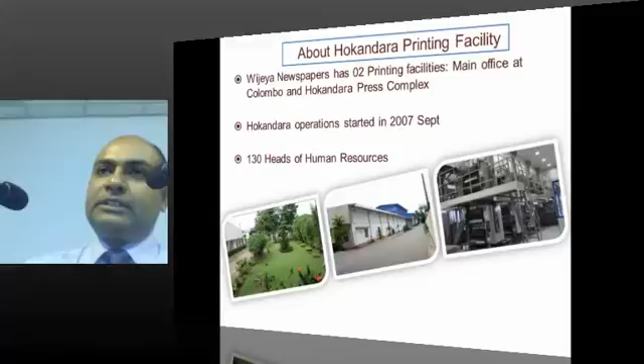Earlier we used to have more than 350 employees to handle the balance 15% operation. That is the difference. I will show you how we reduced this from 350 to less than 150, and what our efficiencies are.

Those are our publications. I think you are all aware of the Sunday Times, and Sunday Lankadeepa is our Sunday newspaper. Recently, 3-4 months back, we started our newest Sunday paper called Desha. Also we have Daily Lankadeepa, Daily Mirror, and others - these are our daily publications. In addition, we have some tabloids: Sirikatha, Tarunaya, Wijeya weekly children's education magazine. We are also aware of Wijeya magazine and Pariganaka magazine, which is the only singular IT magazine in the country at the moment.

Also Lanka Woman, Hi and Go, which are society magazines, and a host of online publications. In addition, 2-3 weeks back we started our newest publication called Tamil Mirror, a daily Tamil paper. We started it only as a midweek publication, but from next week onward we will publish it as a daily paper.

The content of my presentation covers the philosophy change, what infrastructure development we have done, what concepts we used to change that philosophy of infrastructure development, then green initiatives - where the green initiative came from - further improvement to green productivity and best practices, and finally sustaining development through ISO 14001 environmental management system as well as energy management system, and future sustainable building design.

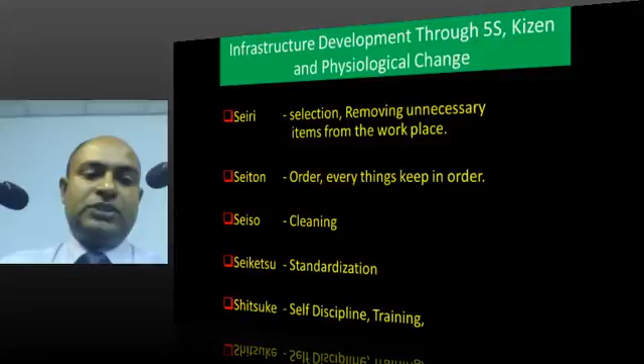So as the first concept, we implemented 5S at Wijeya Newspapers Limited. 5S is a Japanese concept which came from Japan. The 5 S letters all start with S: Seiri, Seiton, Seiso, Seiketsu and Shitsuke.

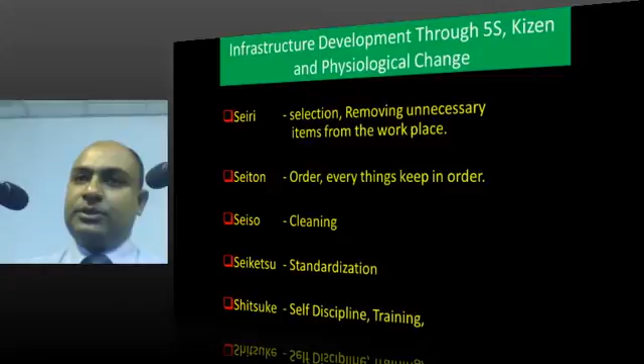I will show you how the 5S started at Wijeya and how we could get results from the 5S. The 5S begins with Seiri.

You can see these are some unwanted items which were gathered in our day-to-day workplace, office premises as well as in the factory area. We called all employees, top management to bottom, to get together and remove all unnecessary items from our workplace. Not only the workplace but also our office, the drawers, cupboards, and from our pockets and handbags. We remove all unnecessary items and then keep everything in order.

The second S is the Seiton, that means each item having its rightful place. We have given separate places for each and every item, not only machineries and equipment but also even pen and pencil, tube, Tipex, puncher, or even cleaning items - we have given separate places for each.

Then Seiso. Seiso means cleaning, with meaning actually cleaning and inspection. Normally every day we get together at 9 AM, all employees with top management.

We spend 5 minutes on this, we call that 5S 5 minutes. We check our office area, we check our machineries - we have divided all our factory premises into different areas and allocated responsibilities. In my responsible area, I have to look and see whether there are any abnormalities. If so, we write it down and later discuss it and do the necessary improvement.

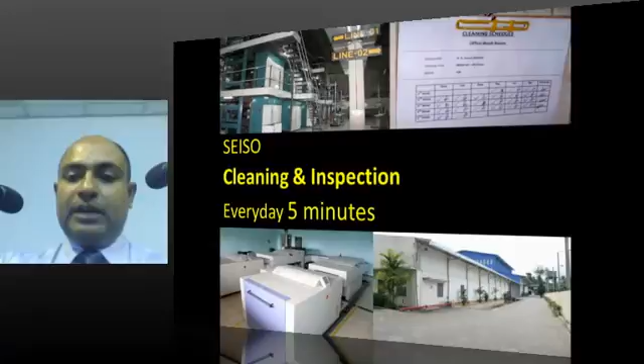Then Seiketsu - color coding, numbering, and directing. We have given a separate color code system. You can see some pipelines - all pipelines, compressed air, wastewater, drinking water - we have given directions to reduce damage to the environment. If something bursts, we can immediately close the relevant valve and minimize the damage to the environment.

Even the notice board - we have given the responsibility to a responsible person who has to maintain the notice board up to standard. We strictly follow the X-Y direction, X-axis and Y-axis. We can't put the notice board just hanging like that - that's our philosophy.

Those are some color coding systems which we have implemented and introduced to our factory. Each and every department has its own color, which they use for demarcation, names, file records - everything - for identification of their department. We have also given a color code system for each and every pipeline, and also some area marking color codes.

For the safety area or dangerous area, if you have some moving item, sometimes we have to keep an item in a place temporarily, and later we can remove it.

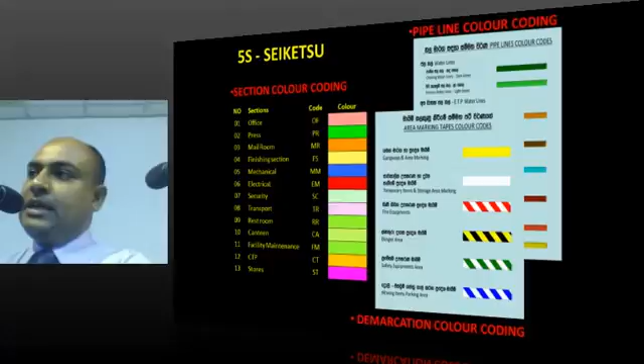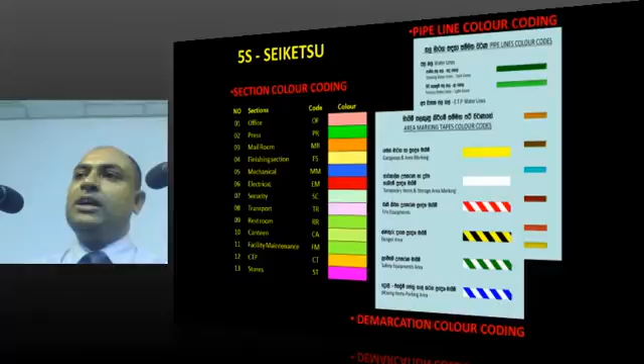But we can easily identify if there is a temporary item, we put some marking. Temporary item and storage area marking - we have marked with the white line. Sometimes that blocks our entrance or footpath, but that's only for a temporary purpose. According to our requirement, we have allocated this requirement.

Sometimes international, sometimes national, sometimes our own standard to do the sustainable practices. Finally, Shitsuke is the discipline, training, and top management commitment, which is very important. If our employee introduces something, implements something, if they did the best work, we select the best operator of the month, and the best 5S practices of the month. At the end of the month, we give appreciation and rewards from our top management or heads of departments. Likewise, we always motivate our employees.

Yes, you can see some developing culture. After implementing some system, whatever 5S, cleaner production, ISO, something like that, at the end of the training program we conduct some slogan or poster competition. We organize some competitions, then we can realize how much they have absorbed in their mind, the knowledge. Only then can they write down or come with their ideas. You can see there are two different competitions.

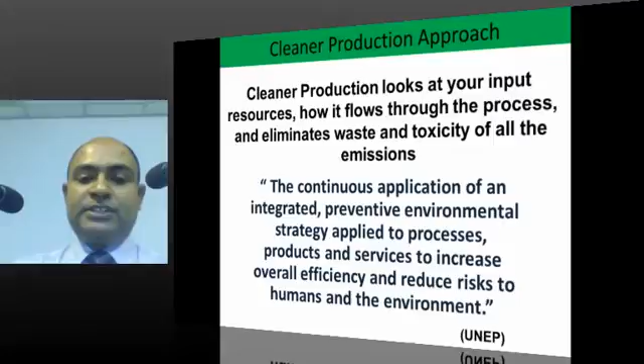The continuous application of an integrated preventive environmental strategy applied to processes, products and services to increase overall efficiency and reduce risk to humans and the environment. Continuous application - which is very important.

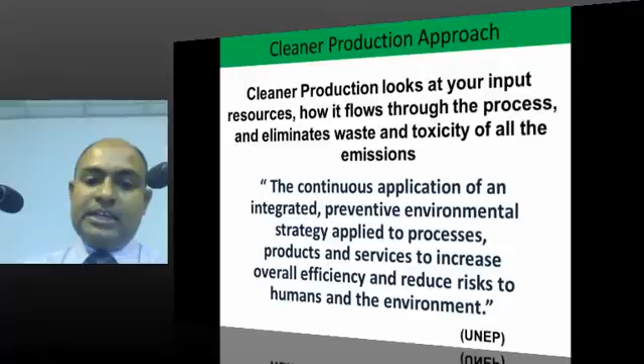That's cleaner production. At Wijeya, we started cleaner production from the 3R concept - 3R means reduce, reuse and recycle. We reduce our consumption, then we reuse whatever material or waste item is possible, then recycle at the last stage.

A very important equation: input equals output plus waste. At Wijeya Newspapers Limited, we don't have this waste - we have added some value to this waste. Waste is a valuable resource at the wrong place, in the wrong time, or in the wrong form. Only then can we say it's waste; otherwise, it's a valuable resource.

You know how I can say that we don't have waste? The secret is separation. You can see this is the separation practice which we have applied at Wijeya. Even in the canteen, we have separated three different bins. The first one is for used waste food collection, the second one is for used polythene - wrapper covers, lunch sheets and so on - and the third one is for paper. Then we send these for recycling separately. Likewise, we have different waste collection centers.

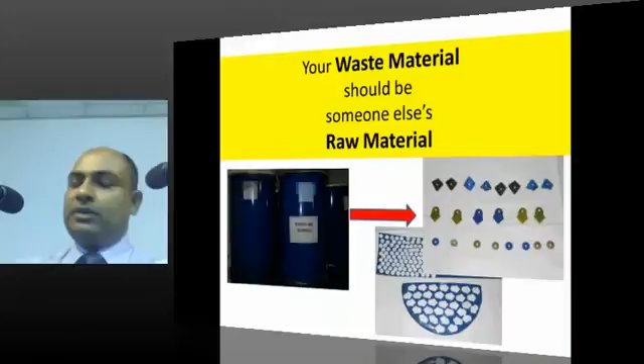This is another simple example - your waste material should be someone else's raw material. Our empty ink barrels we send to a third party person, who comes and collects this waste empty barrel and produces creative products like washers and so on. Instead of purchasing new sheets from the market, he buys our waste empty barrels at low cost, and gets a good profit. Then we don't have any waste product.

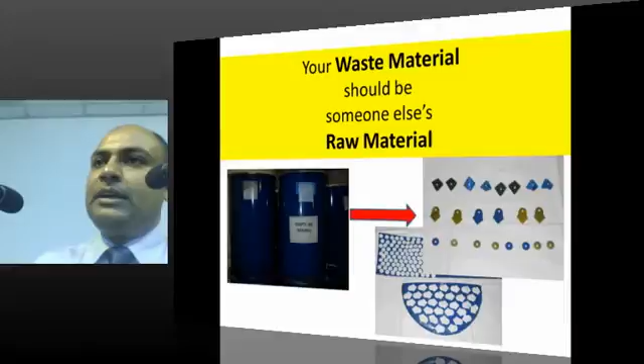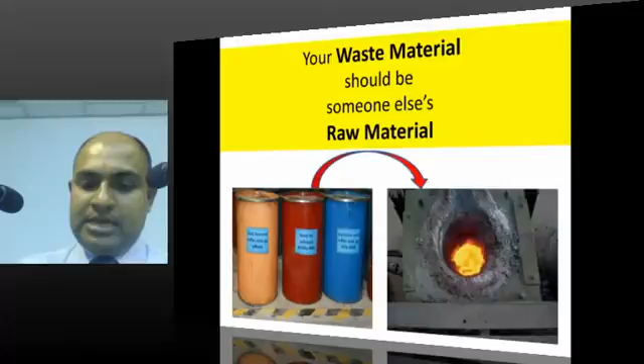Then canteen waste food we put into the in-house biogas unit. We produce the biogas, and we could replace one-third of LPG from our canteen with our own biogas. One-third of the LPG has been replaced by our internally produced biogas.

What we have done here, we didn't do any rocket science or big engineering principle, we just closed the loop. If there is no loop to generate waste, that is the secret.

CTP and process effluent treatment, reused in gardening. We have a separate process wastewater treatment unit. We put all the process water into this treatment plant, treat it, and reuse the water. We don't take any drop of water from the national supply to run our gardening.

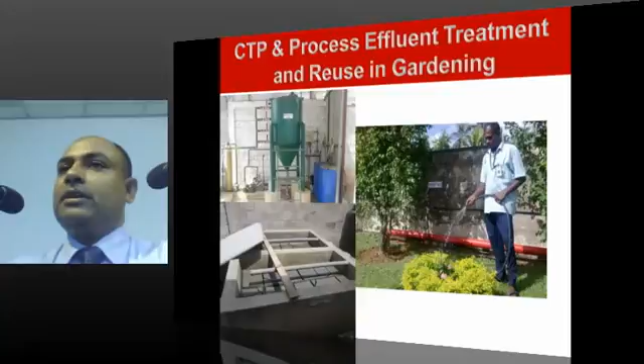Next is the treated shower water used in the building cooling system. Even shower water we do not send into the environment directly, because we know there are detergents, soaps and shampoo that could have a small impact on the environment. So we collect all this shower wastewater into a central tank, put it through a treatment system, and use the treated water for the building cooling system in non-air-conditioned areas through sprinklers.

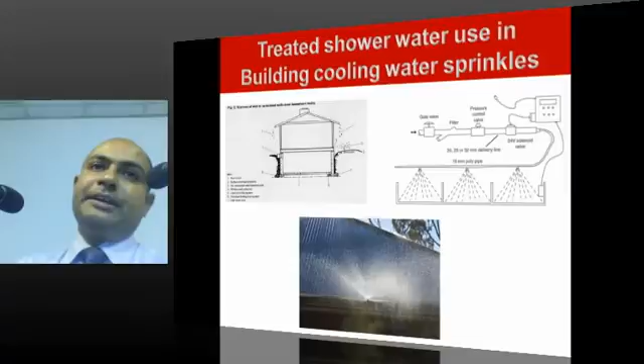Finally, cleaner production helps us improve environmental performance, improve production efficiency, reduce cost, and finally improve the triple bottom line - that means sustainability.

Next we will discuss the next green initiative, green productivity. Green productivity ensures profitability, helps enhance quality of life, and reduces environmental impact. It is a strategy for enhancing productivity and environmental performance for sustainable socio-economic development. It is the application of appropriate productivity and environmental management tools, techniques and technologies to reduce the environmental impact of organization activities.

Not only products but also services - we can apply green productivity to both.

Why green productivity? Looking at its history - actually even today, many industries don't practice these best practices, so we have a lot of environmental pollution. In old days, socio-economic activities were done based on increasing productivity without any concept of environmental protection. Not only in the early days but even today, most of us still practice like this - we get all valuable resources from the environment, and finally we put all the waste back into the environment. That is our practice.

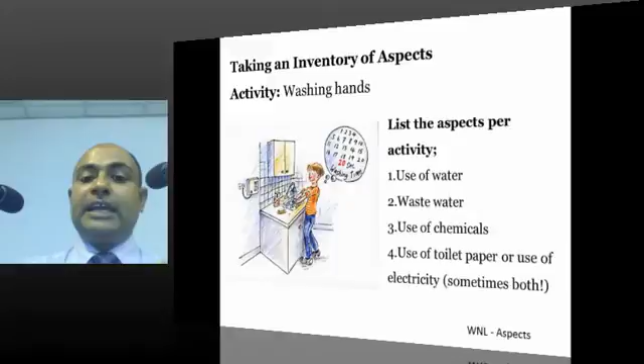Then we will see what are the impacts. If we use water, what is the impact? Depletion of natural resources. Use of chemical - water pollution and soil pollution. The use of toilet paper - deforestation, depletion of natural resources. Use of electricity - depletion of non-renewable resources and greenhouse gas emissions. The small activity of washing hands has this type of impact.

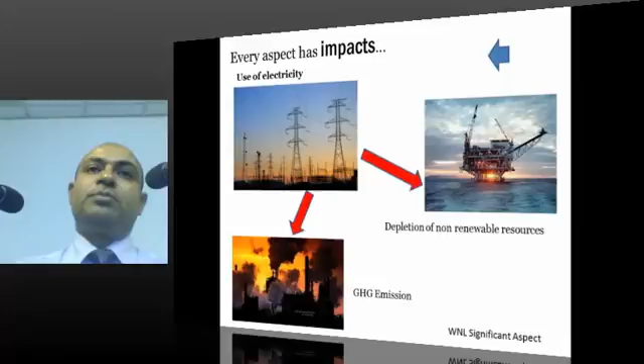We have to seriously consider all activities in our day-to-day operations in our factories and business processes. What are the solutions for this? Yes, we change into best practices. Technology changes from traditional machines to new technological machines, energy efficient equipment, best operational management practices, sustainable systems and practices.

Cleaner production, green production with chemical leasing, responsible care - new concepts which very recently came to Sri Lanka - ISO 14001, 50001, those are there. If we can practice these concepts and practices in our industry, we can sustainably run the business.

I am the person who ran the first chemical leasing case study in Sri Lanka. I did it in 2012. Then I won the global award for this.

Responsible care - again another best system to manage our chemicals. The importing, storage and disposal, all we have to do according to international standards. Then we call it responsible care. I did the first pilot project at Wijeya Newspapers as a Sri Lankan case study. The first one I did at Hokandara premises.

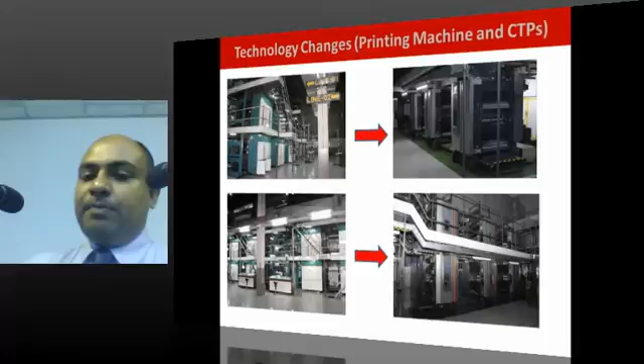But I think now, yes, you can see some technical changes. As I informed you, we purchased the old machine in 2007 with Indian technology. But between 2007 and 2010, we had another 2 generations of development. By 2013, we introduced new machines, 25% more energy efficient compared to the 2007 purchased machines.

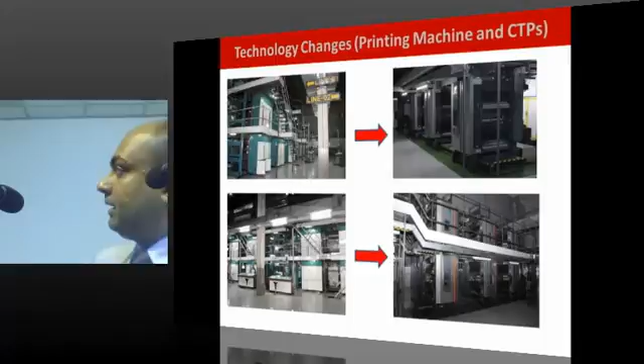Right, the very compact and environmental friendly. The second one, CTP technology.

The earlier one, in 2007 we implemented purchase and installation of chemical processing equipment. By 2010 I could change into the chemical free machines. The second feature shows that machine we can use without chemical, we can develop plate without chemical. By 2010 we need to run this. At that time there was not any chemical free machine, but now it's available, but still some are not economically viable, but technically feasible, economically not viable. We have purchased this so we can use even with chemical also, we can run this machine.

In future requirement we have to purchase this, so in future we can run without any chemicals, that means zero chemical use. That's how we have developed our poly roadmap. By end of 2015 we have planned to reduce our chemical consumption by 25%. We have planned to reduce the raw virgin newspaper, that means paper, by 50%, and we are moving into 100% recycled newspaper by end of 2015.

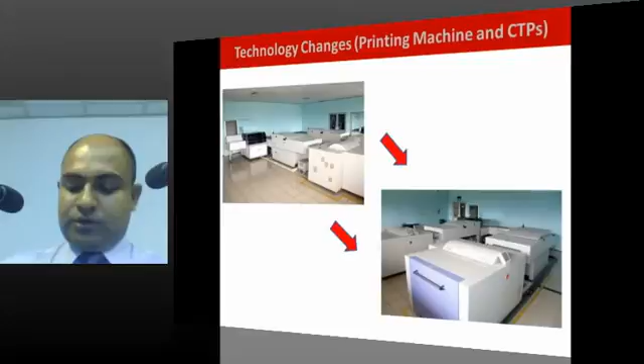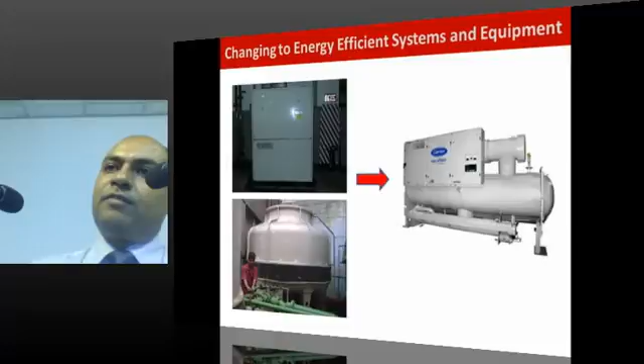The traditional air conditioning system, water cool package, we have replaced with the energy efficient screw chiller, variable frequency drive chiller system, and we could reduce 50% of our energy consumption for the air conditioner from this replacement.

Also, we have implemented TQM, total quality management system: cause and effect diagrams, control charts, histograms, Pareto analysis. Always, if there is something wrong, we don't just give the answers, we find what are the root causes for this particular error or issue. Then only we give solutions. We use TQM practices.

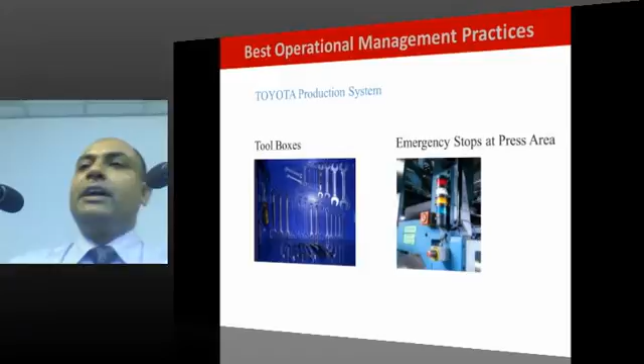Then Toyota production system, we call TPS. We use some Toyota production system, and we eliminate 7 wastes from the production flow. The andon boards for easy identification, to reduce downtime, then eliminate waste. Most of them we have actually locally modified with automatic stops.

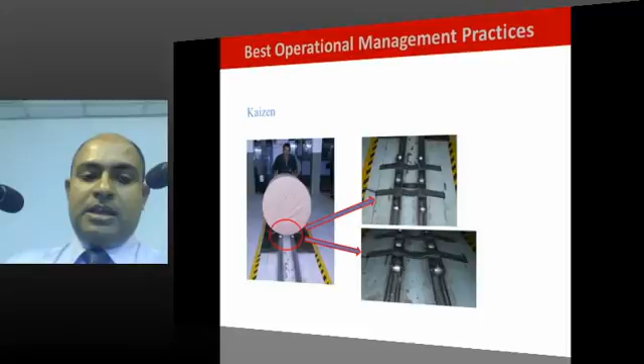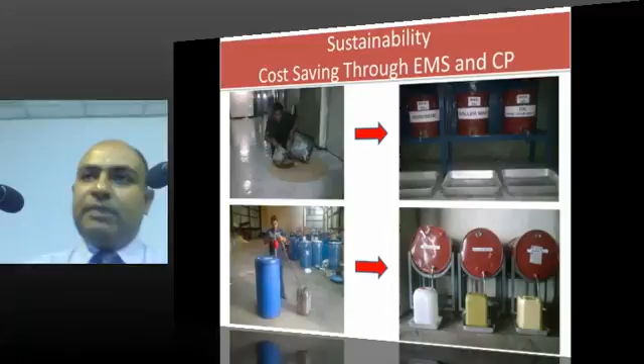High productive use of handling machines. Some chemical handling systems, from the traditional system into the new system with some control valves, we can get the exact volume. Our policy is not to drop any chemical, kerosene, or diesel to the environment. That is why we have implemented such a system.

This is another very good mechanical design, what we call the heat treatment technology, from our university. Normally we use this type of plate before printing. We have to mount it in the printing machine, then image transfers from the plate to the paper. That's normal offset printing technology. Normally this plate has only 100,000 run length, 100 to 120,000 copies. Then we have to use another set of plates.

One plate has only 2 pages. We have some 100 pages, and in Sunday Lankadeepa we have almost 200 pages, so we have to place 400 plate sets for that. Earlier, if you want to print only 100,000 copies, we use one set of plates. If you want to print 500,000 copies, we have to use five sets, because our average run length is 100,000 copies. So instead of that, we thought about how we could improve the run length of the plate.

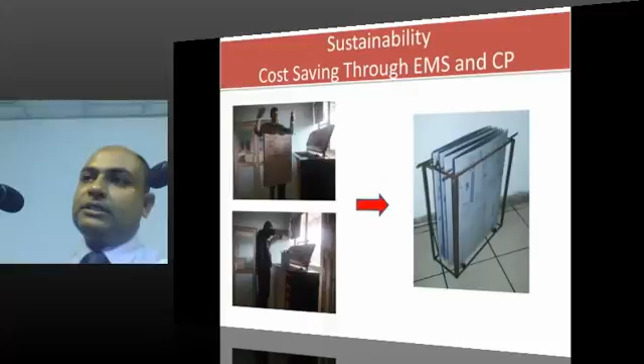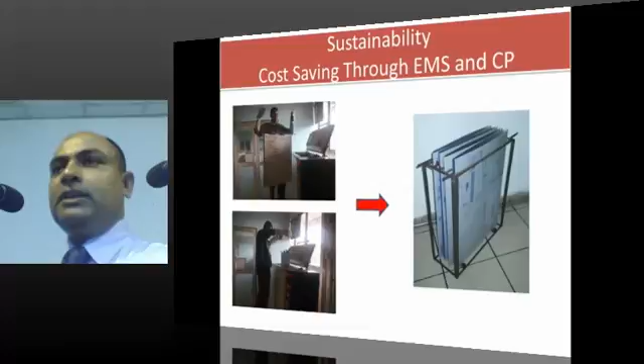This baking oven came with a small hanging unit where we could put only 2 plates at a time, 8 minutes at 210 Celsius. Instead, we designed a small jig so we can process 8 plates at once in 8 minutes. This reduced our energy consumption, because our bottleneck was the plate developing unit. We had to find a solution for the bottleneck, and once we realized that was it, reducing the processing time of the baking unit reduced the overall cycle time. That's how we improved this.

Finally, instead of the traditional dampening system in the printing machine using ink and water transferred through a spiral brush, I introduced new technology called spray bar nozzles, just like car fuel injectors, to spray water onto the paper. We could reduce water consumption by 70%, reduce waste paper quantity, and also improve the quality of reproduction.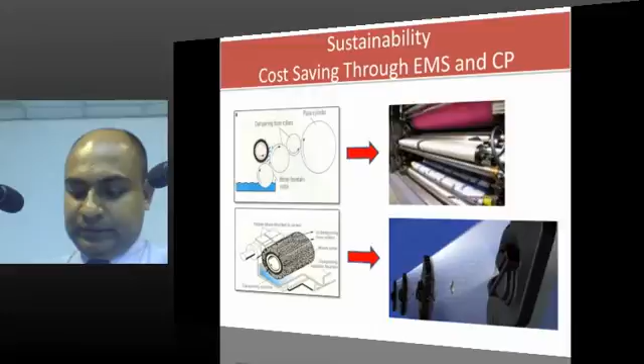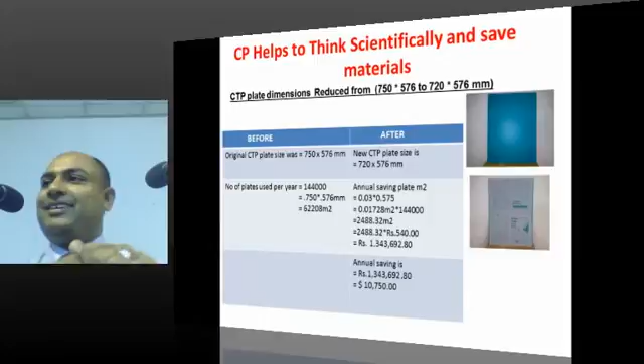This is another classic example of cleaner production. The traditional plate dimension we used, which I explained, was 750 by 576. But our paper width is 700 millimeters. Still, we used 750 plates to print a 700-width newspaper. I don't know why. I asked my top management, when I was at head office as a mechanical engineer, why we were using this 750-width plate instead of 700. They said, that's just how it came to be.

We can't change it, right? Okay, then I discussed with our top manager that I needed to make some changes. They asked what, and I said I need to change this plate size dimension. They said it's a risk, but I told them I would take the risk if they allowed me to do it. They agreed. Then I wrote to the plate manufacturer asking them to send us 100 plates with a new dimension: instead of 750, I used 720, having only 10 millimeters extra on either side. Without informing anyone, I used this plate. Nobody knew. Even today we run these 720 plates.

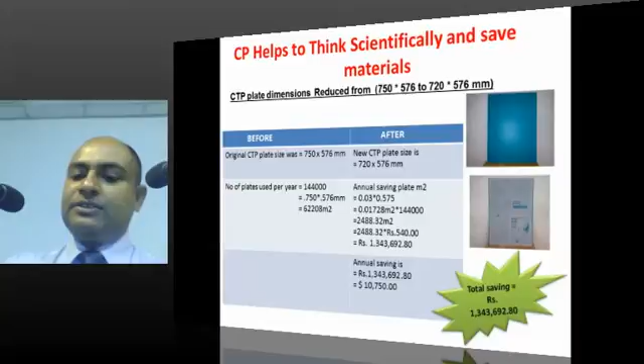We could save millions of rupees. Not only in Sri Lanka, but the manufacturer has informed the whole Indian printing industry, and now even they use the 720 dimension plates. We save raw material, the aluminium, for future generations, not just money. This is about renewable resources too. The annual saving is 1.3 million rupees from just one simple change.

Likewise, there are a lot of energy saving practices and applications. There are 11 energy saving applications, and the annual energy saving amount is 8.5 million from these applications.

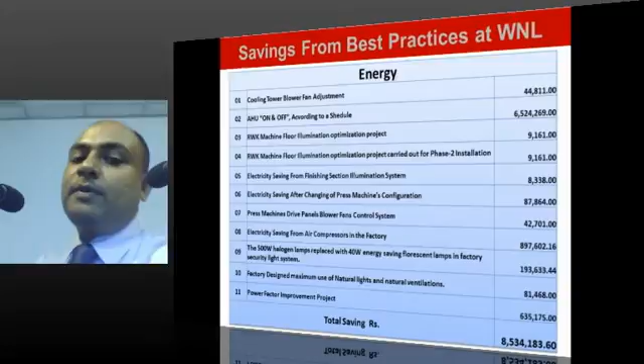Right, I am not going to discuss one by one. The second is manpower and machines. After doing some small changes, we could save 640,000 rupees from manpower. After changing and designing new concepts and technical designing, we could save 35 million rupees from raw material.

Finally, not only the raw material but also water. Water is a valuable resource, right? So we used whatever possible solutions and resources, and we could save 260,000 rupees from last year on water by reducing consumption.

Finally, our annual saving is 45 million rupees from energy, machines, material and water. That is what we call sustainability equals profit. We could improve our profit, and not only that, whatever achievement or savings we make, we share with our employees at the end of the year.

Those are some national and international recognitions. Recently we got ISO 50001:2011 Energy Management System, Sri Lanka National Energy Efficiency Award 2014, National Green Production Award 2013 where we won Silver, and National Green Award 2013 and 2014 Silver from the National Central Environmental Authority.